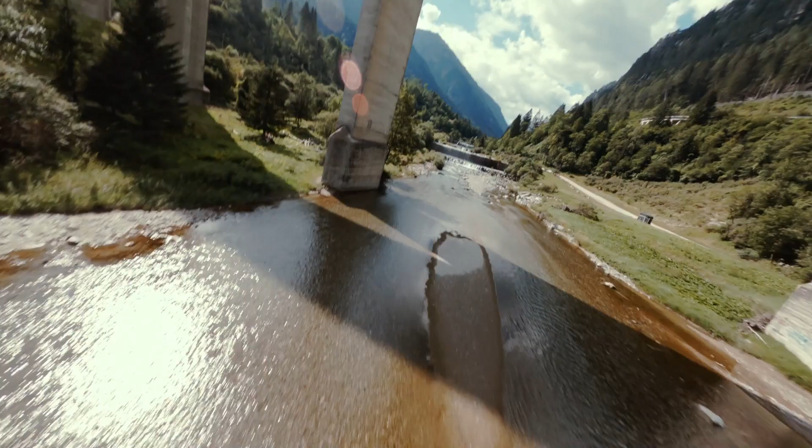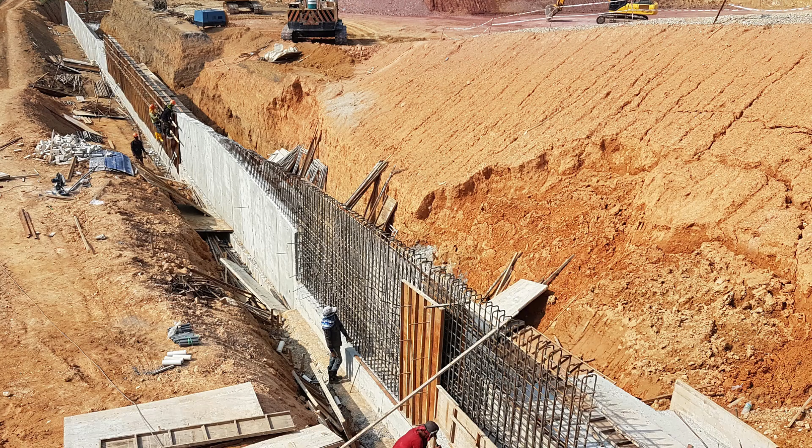Where do we use reinforced concrete? We use it in frames, we use it in foundations. Most certainly, you will not use any other material at all. No matter whatever kind of structure you have, in foundations almost certainly you will use concrete. Retaining walls, dams, water retaining structures, highways, and bridges as well. Even road pavements are made up of reinforced concrete, some of the road pavements in the UK as well.

Now, reinforced concrete beams. Is there any question up to this point? Just one question. Yes, please. How does concrete behave submerged in water for a long time? It's a very difficult question. How does it behave? It requires special additives. Remember that you can add lots of things to concrete to make it suitable for particular applications.

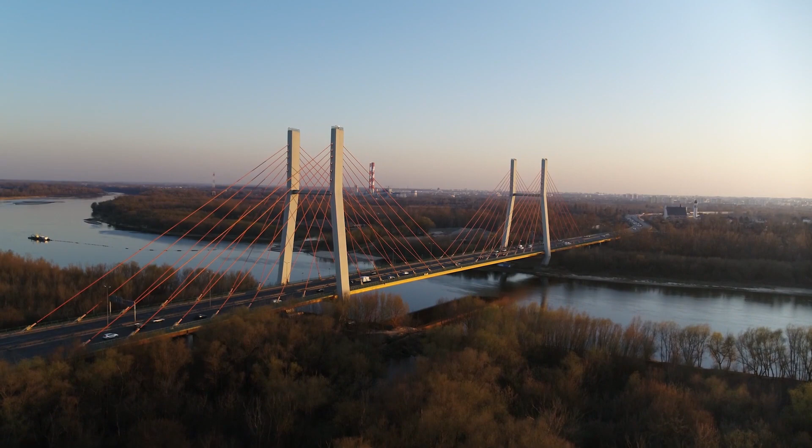So, for example, if you're talking about bridges and their pylons and abutments being submerged in the water, they will have some kind of special additives, superplasticizers, added to make it water resistant, to check its permeability. So for submerging it into water, certainly we need special additives, and certainly we need special types of cements as well. We need rapid hardening cements when you're talking about underwater.

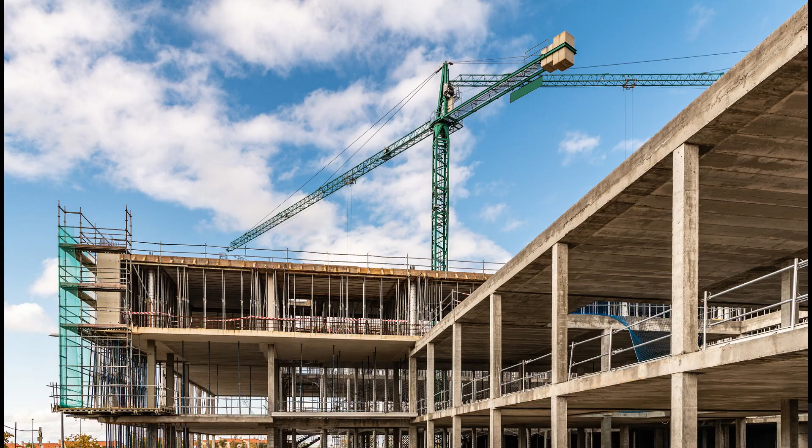So two materials are really very important, steel and concrete. Other materials you can learn, but for a structural engineering career, understanding how to design in these two materials is extremely important. So in a big structure, why would you use concrete instead of brick? Yes, it's a very good question. The reason we use concrete in large structures is that it is stronger than bricks. And it provides a frame as well. By frame, I mean that each component of a structure is connected to each other, so if one component fails, the others will take care of it. And the ability to resist lateral loads as well.

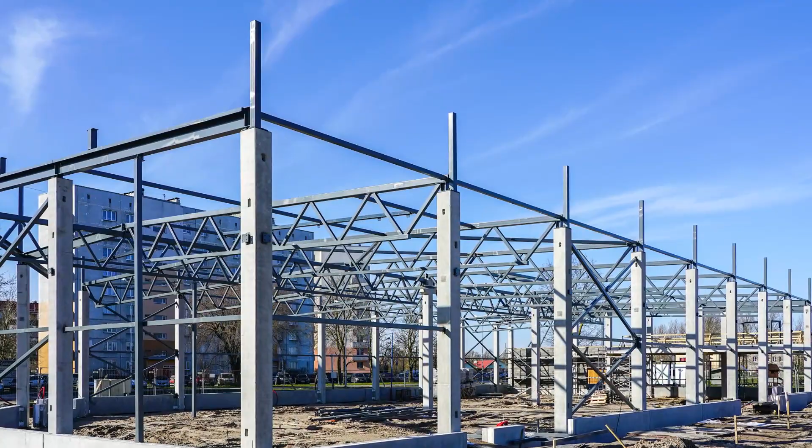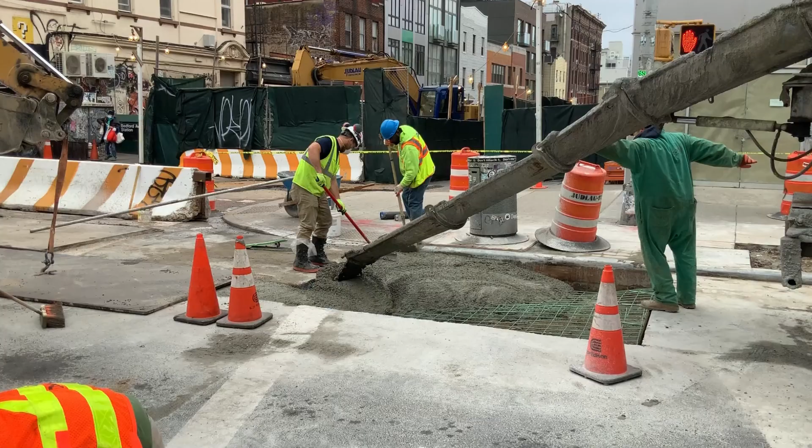If you're talking about bricks, you cannot go more than 3-4 stories. The reason is lateral stability, wind and earthquake. Another reason is the ability to connect with each other. When we construct walls made of brick, certainly there is a connection. We use ties and other things, but they are not as well connected as in concrete. When we cast concrete, it acts as a single unit; beams, slabs and columns act as a frame. So if one component fails, other components will take care of it, and the entire structure is not going to fail.

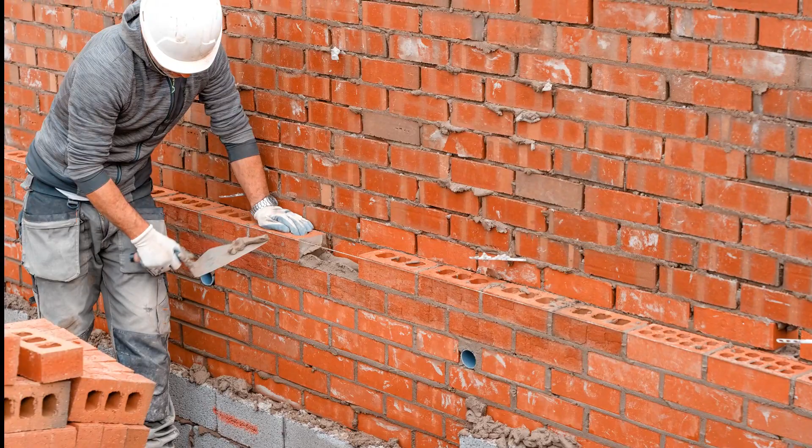It's the ability to be cast in a frame. On the other hand, with brick and mortar, the walls normally take load from your slab. But in the case of reinforced concrete, it's a frame, so the load is transferred from slab to beams and then from beams to columns. You actually do not need walls.

Hi, Javed. I got a question. If the bridge is a combination of steel and concrete, which load would we consider in designing, the steel's load or the concrete's load? It's a very good question, thanks for that. For bridges, when we have a combination of steel elements and reinforced concrete elements, we use Eurocode 4, which is the code for steel and concrete composite structures.

So for composite structures, there is a separate code. I mean, loading is independent of any material, to be honest. So if you're using 1.35 GK plus 1.5 QK, that is applied to steel, that can be applied to concrete. But is that what you're asking, what code do we apply? No, I mean to say, when we are designing the steel element of that bridge, we need to consider the steel design load.

But on top of that, we are putting the concrete slab on the steel element. So in that case, when we design the steel element, do we have to consider the concrete structure in the design load? Yes, definitely. For example, if you have a concrete deck on top of steel beams, then that load will be transferred from the concrete slabs to the steel beams or steel trusses underneath.

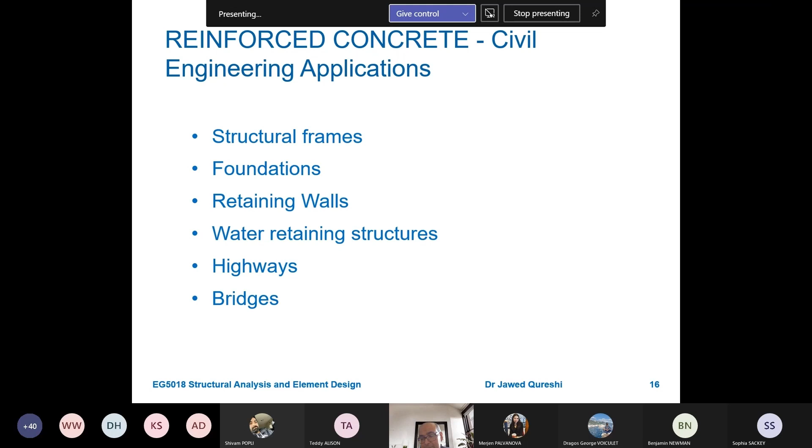And this is the main purpose of today's lecture: we want to design this bottom bar or tensile bar in singly reinforced concrete beams. So let us see what is happening.

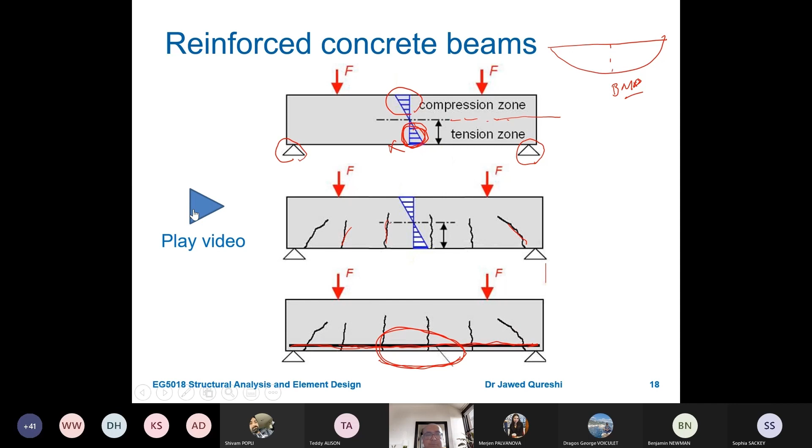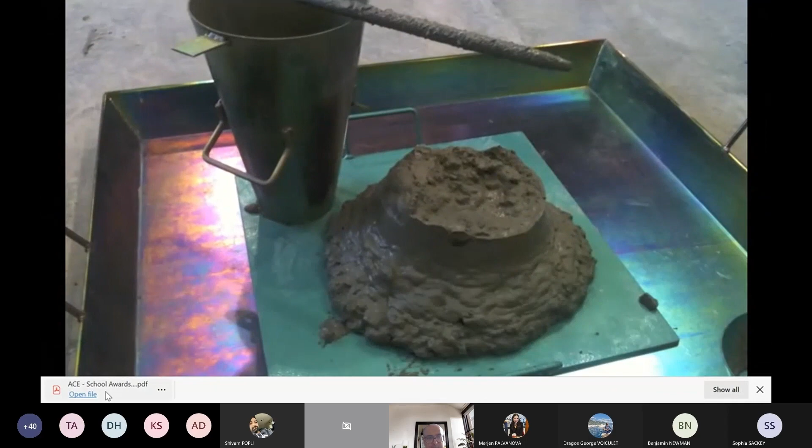I think there is no sound in this video. Yeah, we're not getting anything through. Yeah, there's no sound, I think.

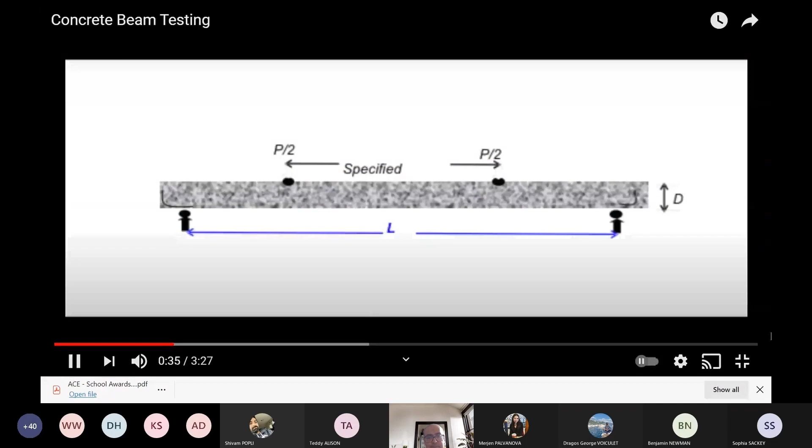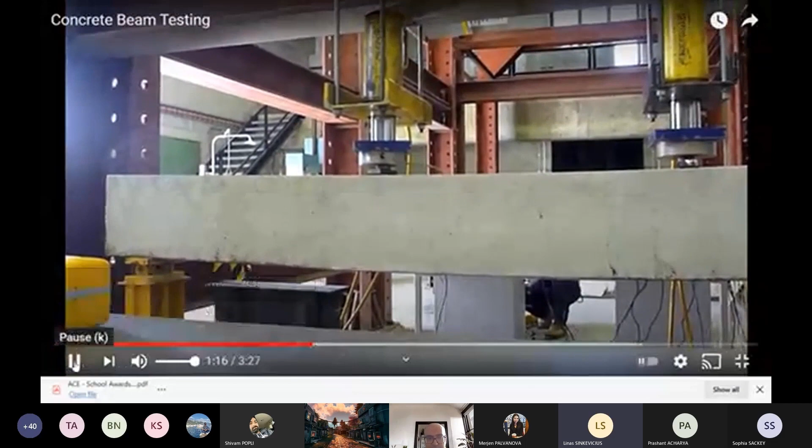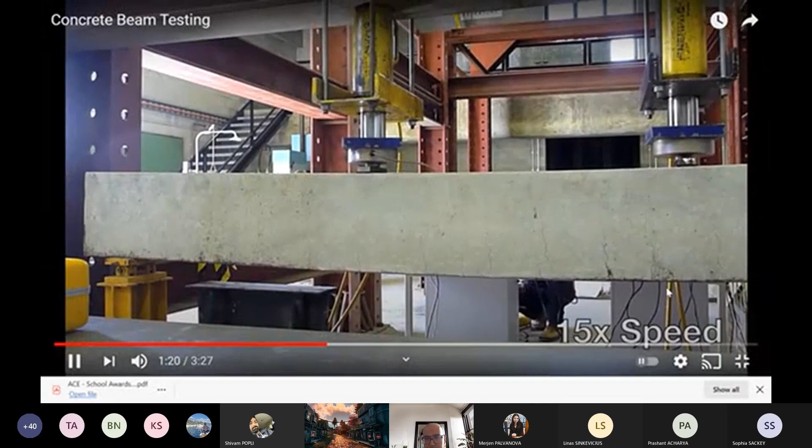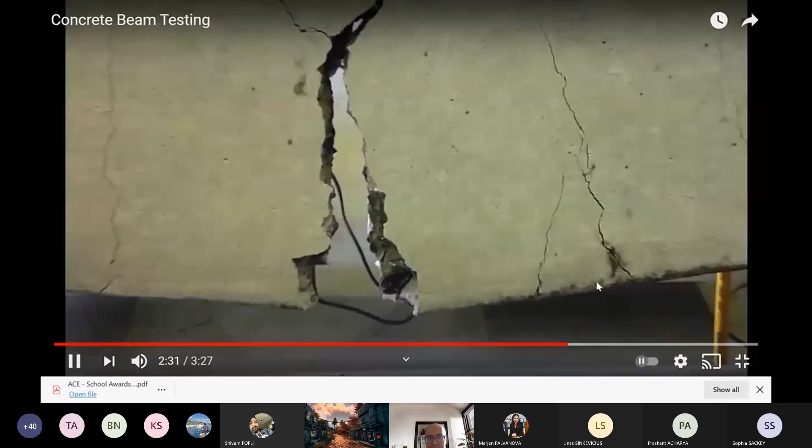You can see that load is being applied, and these cracks are developing when loading is applied. What's the maximum size of the crack? What is the size of? Crack. I don't know what the size is, but they seem to be hairline cracks. So let us see what's happening. The cracks are progressing, and suddenly you will see that this will fail. The experimental failure load was 42 kilonewton.